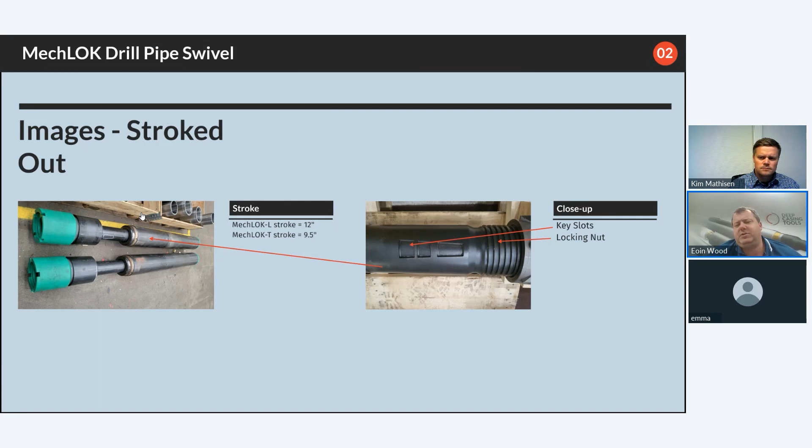You get a small glimpse of the locking mechanism, which is largely similar across most of the variations. You've got locking key slots there and a locking nut, which contains locking dogs. And when the locking dogs marry up with the key slots, that's when the tool is locked. And you can imagine when we do rotate, this locking nut will move along the thread and the dogs are going to go into these key slots. But we'll go more into the specifics of each swivel type when we look at the individual wells. Now I'm going to pass to Kim to give you a little background on the i-Con sub.

You with us, Kim? Thank you. I was muted there for a second.

Sorry, there we are. So the i-Con, it's a drill pipe mounted memory logging tool. So what you get on it, to go straight to the point: axial loads, tension, compression, torque, temperature, inside and outside pressure. The tool is 3 meters long. It's designed to be more robust than a drill pipe, so it shouldn't create any bottlenecks or limitations. And it logs data for 36 days.

So it's really easy to send out without any need of dedicated people to run it. And one of the big reasons for using it is actually when trialing new equipment.

Historically, why we designed this tool, part of the NOV tool portfolio, was to have more data for running liners and lower completions, which historically has been one of the biggest pieces of NPT causing issues in our industry. So by making these operations, liner hangers, lower completions more robust, by having downhole data and also tools like drill pipe swivel, these are two actions which can definitely help operators reduce NPT.

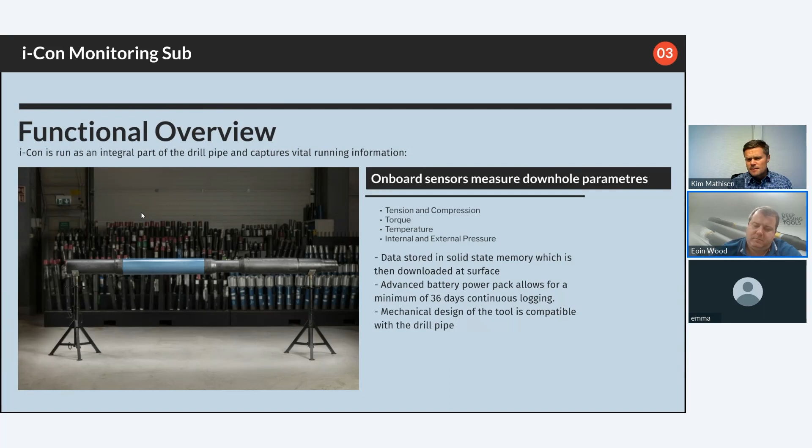So a little bit on the application and track record for a logging tool. The drill pipe swivel is still fairly new. The i-Con monitoring sub is quite the opposite - we have 160 runs globally as well. And you see some of the applications here - in essential it can be all drill pipe mounted runs, but the main applications are lower completions and liners.

You can see a little bit on where we have run it. We started out as a company in the North Sea, a minor Norwegian company, before eventually NOV purchased the company in 2016. After that, of course, the global footprint with the amount of jobs done increased significantly. So we see some of the projects have been with established operators like Total in Africa for field developments. We have written an SPE paper there as well.

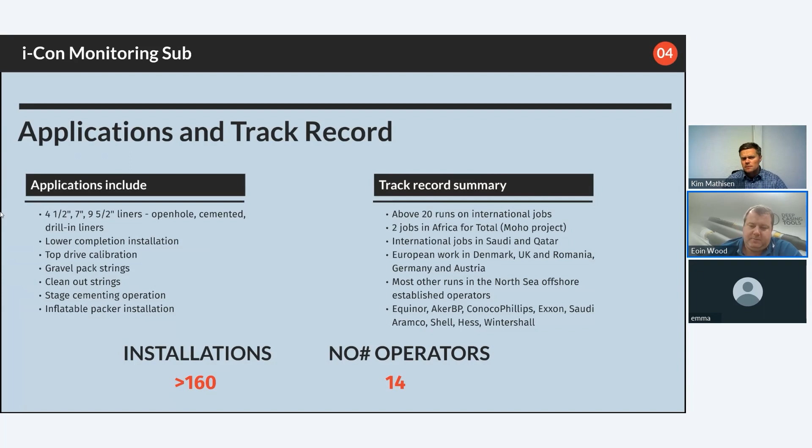All right, so just before we jump in, a little background on the partnership between Deep Casing Tools and NOV Completion. Deep Casing Tools are a relatively small downhole technology tools company based out here in Aberdeen, Scotland, and our partners exclusively for the Norwegian market are NOV Completions. As you'll see over the next half an hour, our collaboration is extremely valuable.

What it's brought to both sides, I think it's paid off for both of us, and we've done some fantastic work over the last 18 months to 2 years with the MechLOK and with the i-Con. Now this is a typical trilateral well that we've been tackling in the Norwegian North Sea.

As you can see, there's a lot of pretty fancy jewellery in there. These wells are long, horizontal. They are completed with sand screens, and more often than not require the aid of a swivel to reach TD. Now one of the main advantages of the MechLOK tool is the ability to reset and rerun our tool.

So you'll see the theme as we go through the 3 examples that our tool was run in each leg of the trilateral. We're running the tool 3 times on each run without a full redress, and it can be reset and rerun on the rig. So it's very simple, and all the loads, all the rotation, all the weight that our tool has seen is all recorded brilliantly with downhole data.

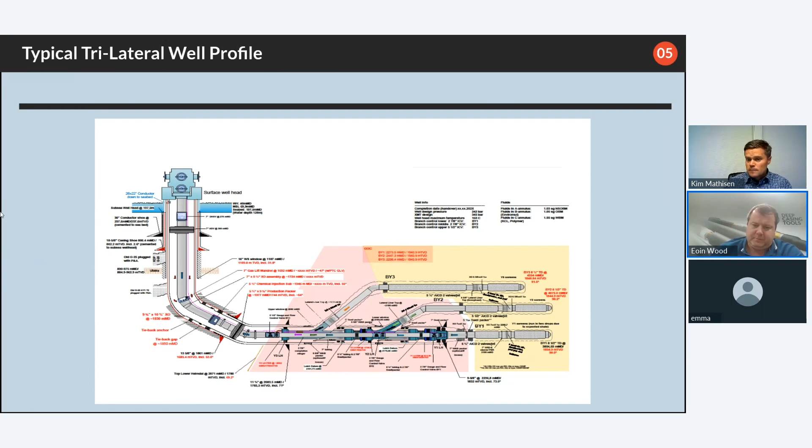Yeah, very good point. Okay, we'll get on to the first of the trilateral wells now. So this was approximately 2 years ago now. Seems like time just flies when you're having fun.

So this was our MechLOK L tool. Now the original MechLOK tool, in compression, was a swivel both ways. So in compression you can rotate the drill pipe and you will not transmit torque to your lower completion. To lock the standard tool, it was 25 right-hand turns of the tool in tension, and that locked the tool.

Now this customer in Norway got in touch with us and wanted a very nice, simple tool that would lock to the left in tension, which would allow them to activate any mechanical emergency release mechanisms they had.

Now, we ran with the i-Con in all 3 branches of the trilateral, and the same single tool was run in all 3 branches. So it was run 3 times and passed MPI inspection on return to town.

And all 3 laterals were successfully deployed to TD. The first well we did was very much a trial well. I don't think the trajectories were as challenging as wells 2 and 3, but we still got some absolutely fantastic data back.

Okay, so this is very much your territory, Kim. I will pass over to you. Yeah, it's my territory, and I think it's good for the audience just to get used to this format, because this will be the same for all 3 wells.

We're starting on the first one, G09. So typically after we have done this downhole data jobs, we go to the operator, ask them for the rig data. We put the rig data in one big file with the downhole data, and then we put them in our plotting software, and we make analyses like this.

So let's see what we have here. The objective for the first well, it's a trial run for the MechLOK. So we wanted to check that the swivel tool is doing what it's intended to do, swivel. And we also wanted to check that the tool is locking on an operator well. So on the left side, we are focusing on the swiveling part.

So at the very left of this graph, you will see the bit depth. We are at TD at 3,414 meters, and we are running down the very last stand. Before we do that,

we pick up, and we can go all the way up here at the orange, we will see your hook load. So first we pick up, and then straight below we have the i-Con weight. And the i-Con weight - we didn't mention it - we put the logging tool directly under the MechLOK swivel. The reason for it is, to prove when we are doing rotation, to not have any, hopefully, torque below on our completion jewelry.

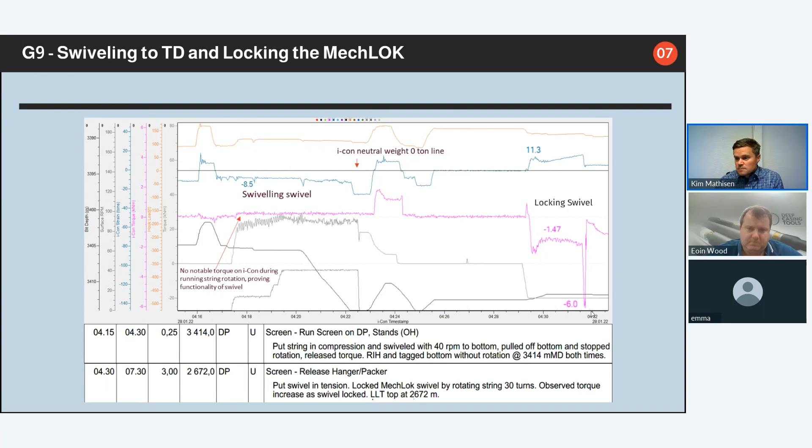Perfect. Okay, just before we look at well number 2, Emma, do you want to share the results of the poll with us?

Yeah, thanks, Eoin. So I can confirm that those who answered the poll question answered yes. Fantastic, as we'd hoped - so downhole data would be useful when running screens into a long horizontal well. And yes, we agree, and we hope to prove that to you as we go on even further.

So we will move on to well number 2. This happened just over a year ago, I believe - I lose track of time. So this one was a bit more challenging, and the customer approached us. Well, we approached the customer. We had a discussion, and we asked them what they would like to see in terms of improvements or changes.

And we looked at producing a tool. This particular operator had issues in another asset with residual left-hand torque building up through the completion and releasing their running tool early, which is obviously a bit of a disaster for an operator in a long horizontal well. So we also wanted to create a swivel that was capable of swiveling in tension and compression. So the MechLOK T was born, T standing for tension.

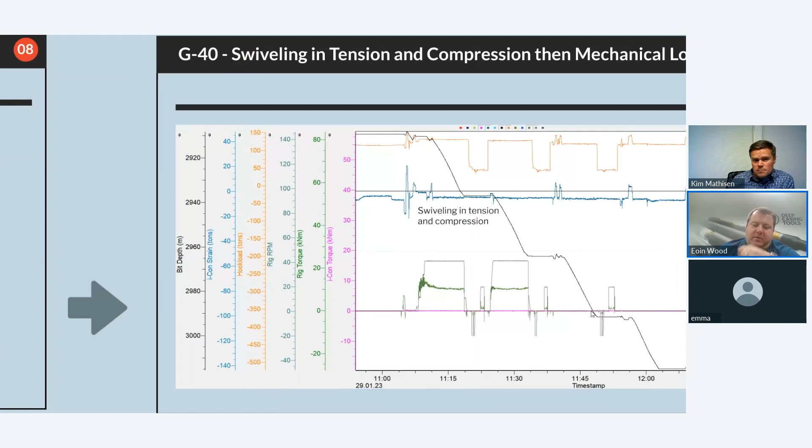Okay, so this one we're going to be concentrating on swiveling the final 4 joints of screen to depth, and we're also going to be focused on the locking of the MechLOK T and the mechanical release from the liner hanger running tool.

That's right. So we are 3,000 meters here, still at the same operator. So the well is G40, and we can start with the swiveling. Again, the operator wanted the same. They wanted to test that the tool is swiveling. They wanted to lock it, especially since this is a new configuration.

So on the swiveling, if we go to the left here, you will see that they also are having the tool here in compression and tension. That's when the blue line is above the black horizontal line here. And at the bottom, you see in the same kind of manner, we are having our rotation here. So we're having 40 RPM. We are having around 15,000 Newton meters right-hand torque on surface. And you see our tool, again, i-Con below MechLOK is measuring 0 just as we want.

And during the first stand here, we are swiveling both in tension and compression. On the second stand, only in compression. So, swiveling confirmed. Locking sequence. This one is a little bit different locking method, I would say. Still start with having the tool in tension. So we pick it up. And then when we have it in tension, we start our left-hand rotation at surface.

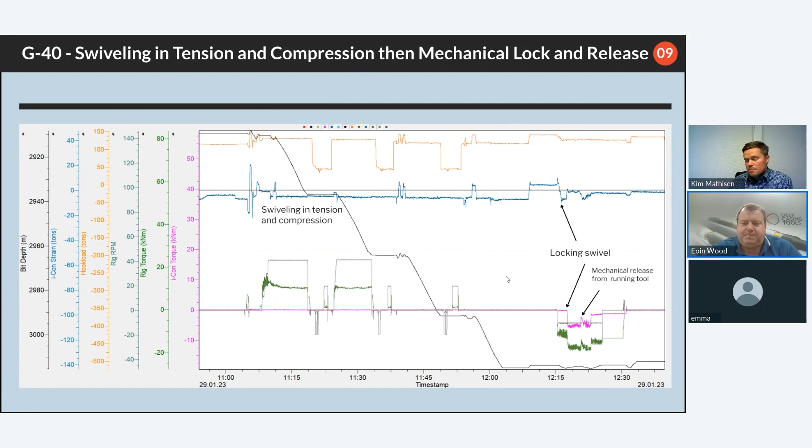Yeah, spot on. When we are coming to those discussions, when these technologies can help the operator make 2 trips into one, that's really very easy for all parties involved to see that this must be very efficient and interesting to consider, right? We had a similar one on this project, where on several of the screen runs, we go down, install the screens, and when we pull out, with the same trip, we are retrieving the whipstock instead of pulling out and doing a separate trip for whipstock retrieval. Nice one. So that takes us through the second well and the use of the MechLOK T.

Now the final well of the 3. We again talked to the customer. We had a lot of collaborative learning sessions with them, and we decided to develop in conjunction again with this customer the MechLOK R, the R standing for ratchet or sprag, essentially. Now, on this tool, there is essentially no locking mechanism. It will always swivel to the right, and when you turn left, it will always rotate the entire string. So it's very good for quick mechanical releases.

Now, this customer wanted a tool that was simple, still was robust, but would perhaps not require an offshore engineer to run due to POB constraints, which are very, very common around rigs around the world. Now, you'll see now that the amount of runs we did on this well was higher. So there were 5 runs.

Now this well was a lot longer, a lot more challenging, and we actually had to initiate some screen drop-offs. So we ran the screens in 2 sections in a couple of the laterals due to the long length of the laterals themselves. We managed to deploy all 3 to TD once again, and we used the primary tool 3 times and the backup tool twice. So logistically, only 2 tools offshore compared to perhaps maybe 4 or 5 for a competitor tool.

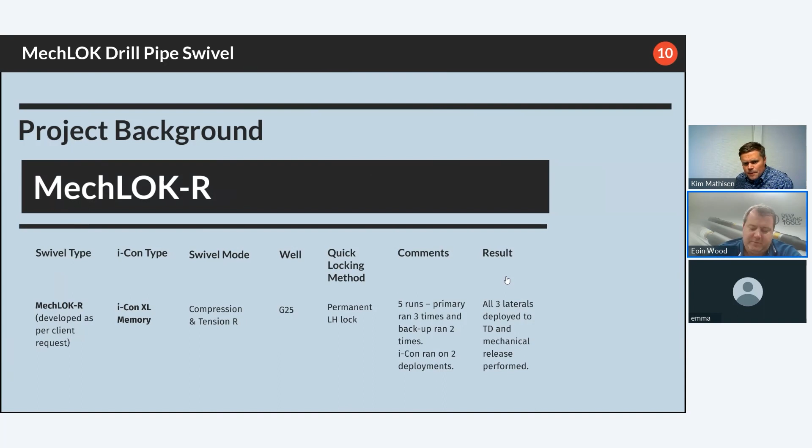And yeah, I think we can jump directly on the plot. Let's do it. There's a lot going on here. I guess more of the focus here is, we verified the swiveling and locking functions of the MechLOK now with the downhole data. I think now this is more of a focus on us trying to do a mechanical release from the liner hanger running tool.

Yeah, spot on, and also to make some variation to the webinar, not just showing a 3rd tool and that we are able to swivel a tool. We have seen that on the previous tool. So again, we did that with the 5 runs here with the MechLOK R. We proved the swiveling, locking. Nothing to say about that. So the operator challenged themselves a little bit here, and they wanted with the MechLOK R to do a mechanical release with a new drop-off system, which historically used hydraulic release.

And this was one of the longer laterals, deep ones. And this is a good plot which shows really the value of downhole data. So if you look at this, they ended up using 3 attempts of activating the left-hand release on this drop-off liner system. And you can kind of see that from 15, 30, 32 minutes. That's the 3 attempts. But this is really where downhole data shows its value.

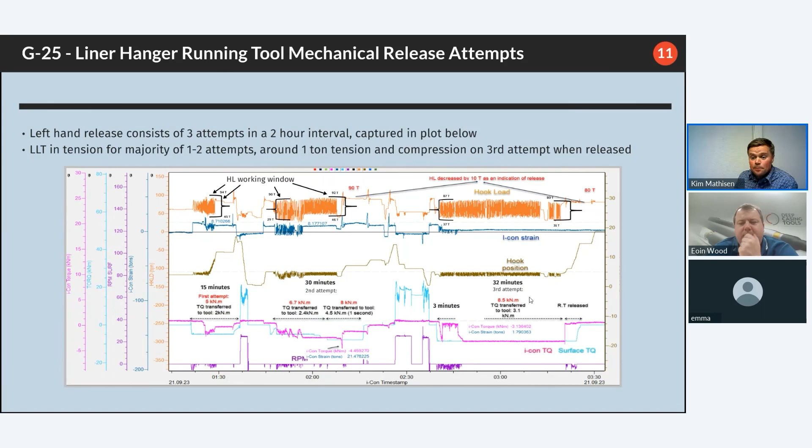So let's go on to the third attempt where we actually succeeded. This one? Yeah, let's just zoom it in. We have spoken about the other one. So again, this is showing the beauty of downhole data. So we have identified now prior, I used to call them red lights, yellow lights, what went wrong, why didn't we get down enough torque.

So in the third attempt, we were working with the right amount of weight at surface and the right amount of torque downhole. So around 30 ton and around 8,000 Newton meter left-hand. And look what's happened here, this is when the magic happened. So by using the right surface input, we are getting down the right torque in just a matter of minutes. So within 1 minute here, we see after 2.45 minutes of working, we get the 3,300 Newton meters left-hand torque down.

And then in total, we ended up using 30 minutes here before it was released. But from a data point, we can ask the service provider, well, did your tool release after 2 minutes, or was it after 3 minutes?

Or at the very end when we picked up. That's the only place where we picked up. It's a good chance we released before, but we definitely released after 30 minutes. But maybe we released after a couple of minutes. And then again, if we are looking at here, conservatively we used 30 minutes here on the successful release attempt. And comparing that to dropping a ball, 1 or 2 hours, there is definitely a potential of saving time here as well.

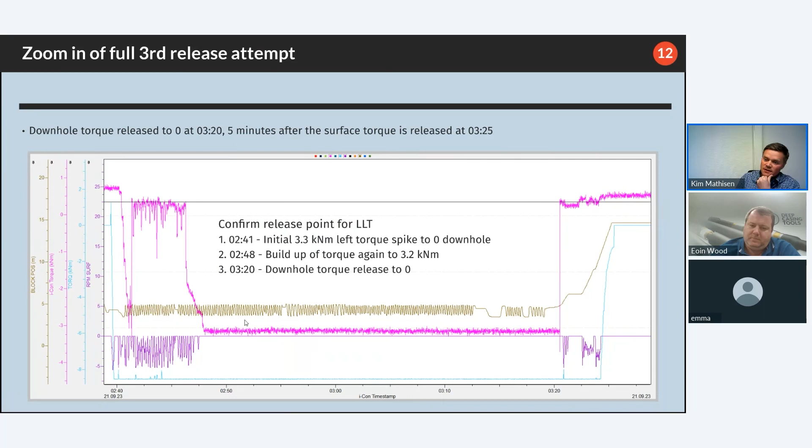I think as well, this pulls the liner hanger company into this equation, because we're providing valuable data for them, for the operator, for NOV, and for Deep Casing Tools. Yeah, we will come with a customer statement at the end here, but I would also like to focus on: we are one big team trying to get better, with all the service providers on the string, right? So the liner hanger providers, if you have screens, completion packers, everybody will gain the benefits of having downhole data. It's almost like having pulse data when you are doing your training nowadays, right? It just helps. No downside, it only helps.

Absolutely. And I'll let you guys read through the testimonial. This was the senior completion man that was on the rig. We were supporting him remotely from our bases in Norway and in Aberdeen. A very nice review. And we do feel part of a very big team working with this operator. They've had the benefits, and we've all had the benefits. And it's very much a team collaboration, and something that we will be looking to continue in the coming months and years. So, Emma, do you want to please share the results of that second and last poll?

Yeah, thanks, Eoin. So another overwhelming yes from everyone who answered the poll. Everyone answered yes to that one as well. That's what I like to hear. So it's whether this data would be even more useful in real time when running your operation, and that kind of brings us nicely, Kim, to the rough forward plan for this field and for our tools.

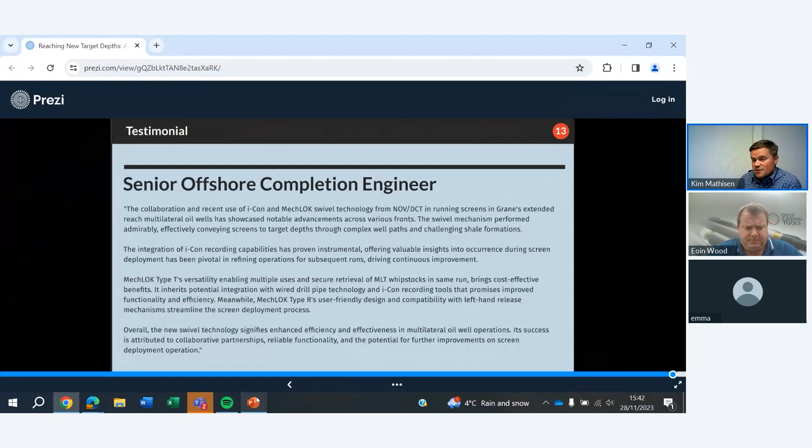Yeah. So historically, if we go back to the downhole data tool, one of the first questions our reps always get: memory is fine, it's beautiful, it will add a lot, but real time, that's the golden egg. That's making changes on the ongoing well, in real time. You can imagine everything we have discussed here in real time instead of learning afterwards. Just a recent example where we had 3 attempts, real-time data would just help us straight on. And for real time, we have a solution with that as well.

So NOV purchased our Norwegian company in 2016, and they have a technology called wired drill pipe. So we use that as a platform to transfer data real-time from downhole to surface via drill pipe. That's more or less just a drill pipe with a physical wire inside each drill pipe and then a coil in each connection. So I'm happy to talk about that. We have written SPE papers about the tool and the platform, about how it's set up as well. Well, that takes you on nicely to the first question, Kim. It's: do you have any case histories or SPE papers describing the tool used in conjunction or standalone?

Yes. We have several SPE papers of the i-Con memories, both here in the North Sea, and also from Africa with Total. We have with Hess here in the North Sea. We also have one SPE article with the i-Con real-time version. That's, I guess, the newest one. And then we have, I guess, Eoin, one baby in the oven here as well. We are writing one SPE paper with this combined, where we are using downhole data with the drill pipe swivel, and we also have the operator on board on that one. So look out for that one. I think it will be an interesting one.